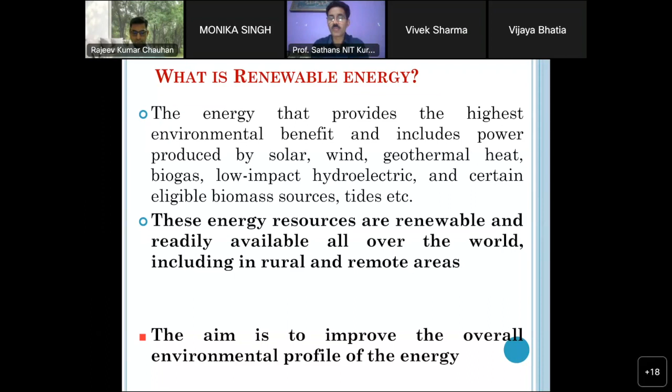These energy sources are renewable and readily available all over the world, including in rural and remote areas. The sun is available all across, wind is blowing all over the surface, there are tides somewhere. So we have this energy available all over. The aim is renewable energy, to improve the overall environmental profile of energy. Is the energy that we produce and use environmental friendly? So to improve the overall environmental profile of energy, we try and go in for renewable energy.

Why renewable energy? Number one reason, depleting fossil fuels. When we talk of fossil fuels, we talk of coal, oil, natural gas, etc. These fuels are limited, they have a limited stock underneath. There'll be a time when these sources will not be available. If you talk of oil, maybe 100 or 150 years down the line, if we keep using these fossil fuels at the pace we're using now, 50 or 100 years down the line we'll not be having these sources. Then what will happen? Where from shall we meet our energy needs? So depleting fossil fuels is one of the important reasons for thinking around other alternatives, and one of the important alternatives was renewable energy.

Concern for environment, another important reason. To me, I think this is rather reason number one. These fossil fuels are damaging the environment, creating this so-called climate change, creating global warming because of the burning of these fossil fuels and release of greenhouse gases, resulting in global warming and climate change. So concern for environment, the adverse impact of these fossil fuels on environment is one of the important reasons to go in for renewable energy.

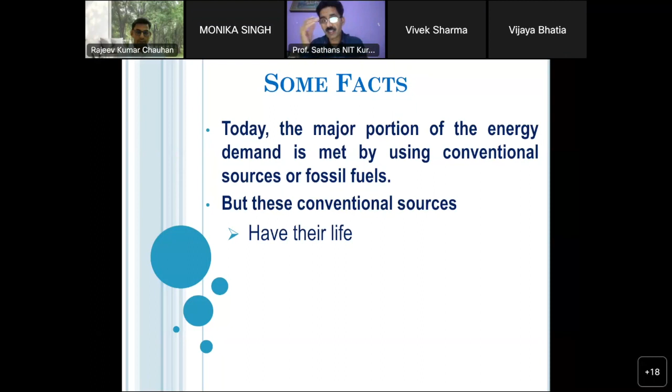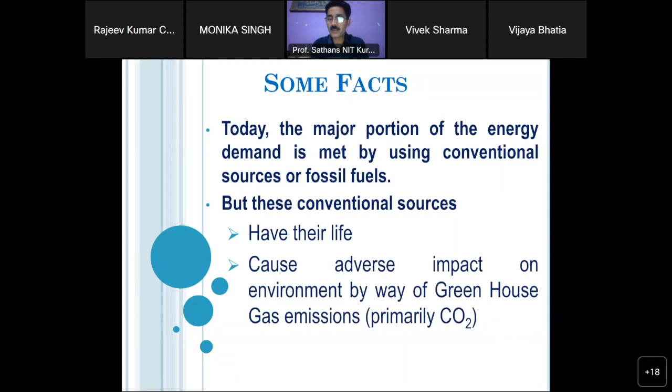So, and even otherwise, if you think that yes, these sources do have a life, these sources cause adverse impact, negative impact on the environment by way of greenhouse gas emissions, primarily CO2. So they do release, when the fossil fuels are burnt, the greenhouse gases, and one of the important constituents of greenhouse gases, and the sizable portion of that, is only CO2.

Continuing with the most abundant greenhouse gas, accounting for about 3/4 of greenhouse gases, is carbon dioxide, CO2. Almost 75-76% of the total greenhouse gases is your CO2 alone.

Other greenhouse gases are also there, and that includes methane. If you talk of CH4, methane, that's next in the proportion, right? Which comes from landfills, coal mines, agriculture, and oil and natural gas operations. These are some of the sources for methane. So that's another important greenhouse gas.

Nitrous oxide, N2O, which comes from using the nitrogen fertilizers that we use in our agriculture sector, and certain industrial and waste management processes, and burning fossil fuels. So these are the sources for nitrous oxide gas.

Then high global warming potential gases, GWP, which are human-made industrial gases, which are not naturally occurring. So these are the naturally occurring gases: CO2, CH4, N2O. But then we have high global warming potential gases, and these include, and that is the cause of concern, right?

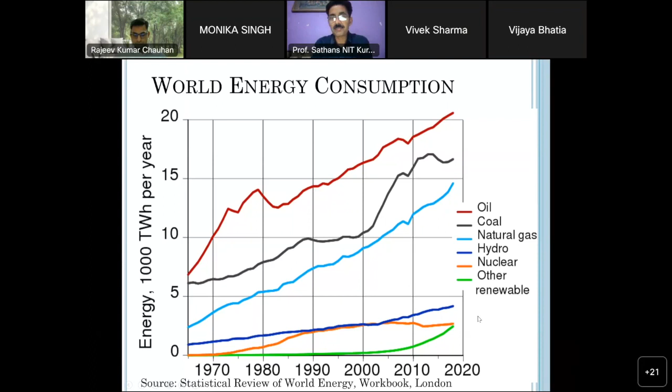If you talk of other renewable sources, from the 1970s until around 2000-2010, we can consider the share of renewable energy in this overall configuration to have been almost negligible. Since then, if you look at the slope of this green curve, it is rising very steeply. Though the data is a little old, given the pace at which this is rising, soon renewable energy will be surpassing all these other sources and will become the number one energy contributor in the overall energy mix. So, how much longer can we depend on fossil fuels?

We cannot continue at the same pace, because they are fossil fuels. They have a life expectancy beyond a certain point, whatever that may be - 50, 100, 150 years - without any renewables. But since we are concerned and worried, we have started working towards renewables, so we'll be having these reserves that we'll not be using.

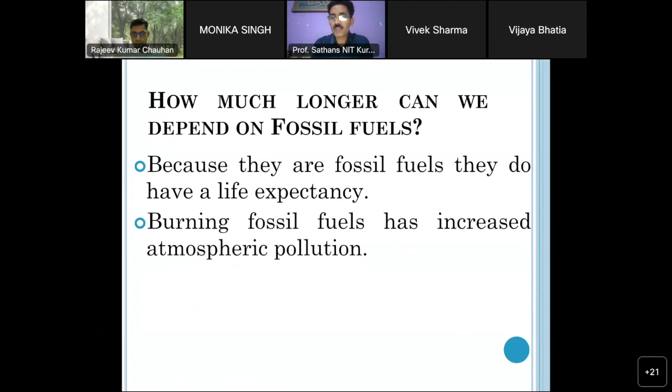Burning fossil fuels has increased atmospheric pollution. The carbon stored in fossil fuels is released as carbon dioxide when they are burnt, and this leads to the greenhouse gas effect, resulting in global warming.

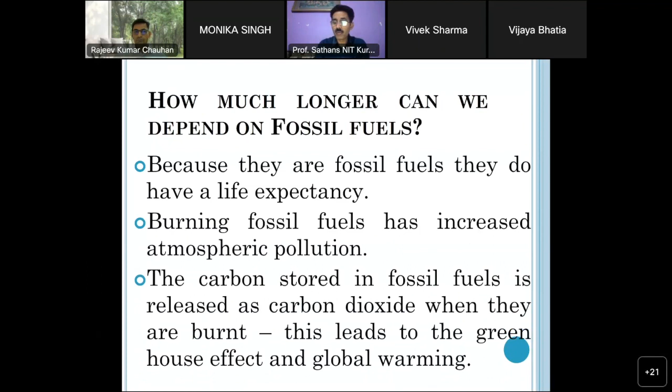So this is where we need to arrest this rise in temperature if we want to reverse climate change, or reduce global warming. We need to cap this, first stabilize it, and then make it negative. That's the need of the day, and countries and governments are working towards it - very soon, with renewables entering the energy mix, that will definitely reduce, and go towards the negative.

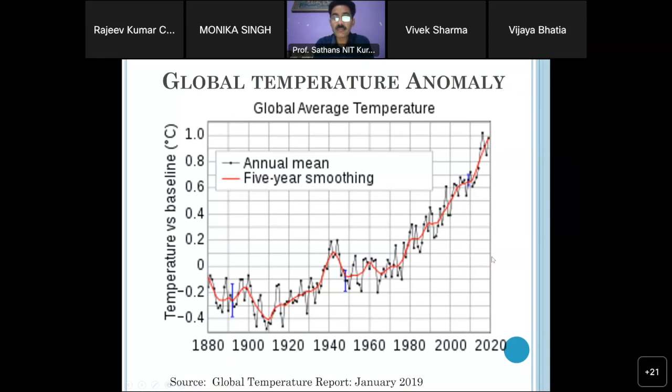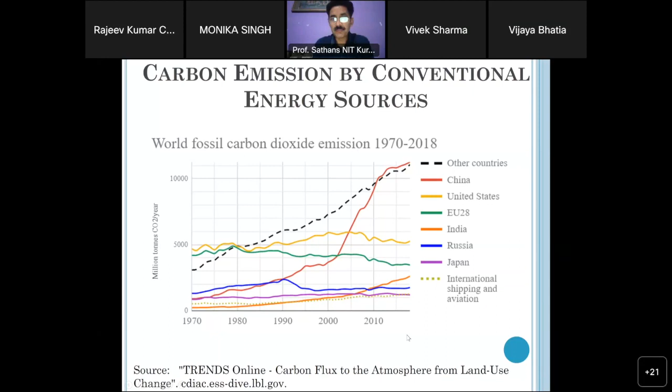Non-conventional energy sources are also known to you, or you may call them renewable. It's the same energy generated using wind, tides, solar, geothermal heat, and biomass, including farm and animal waste - this is known as non-conventional energy.

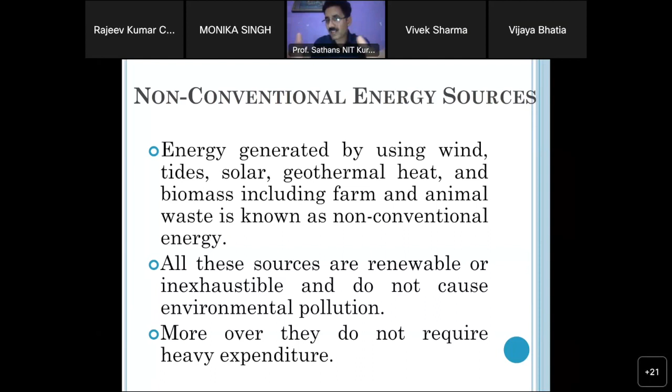All these sources are renewable or inexhaustible and do not cause environmental pollution. Moreover, they do not require heavy expenditure, except perhaps installation cost, and with evolving technology, even installation cost is coming down. Technology research around these resources is bringing down the production cost of windmills, solar PV cells, etc.

Non-renewable versus renewable: natural resources that can be replaced and reused by nature are termed renewables, and resources that cannot be replaced are termed non-renewables. Renewable sources are replaced through natural processes at a rate equal to or greater than the rate at which they are consumed, so depletion is usually not a worry.

If you talk of solar energy or wind energy, till the time there's life on this planet, there'll be wind flowing and there'll be sun. If there's no sun, there's no life - that's the end of it also. So for these resources, depletion is not a worry; they are there till there's life. Otherwise, there's no life and it's all gone and finished.

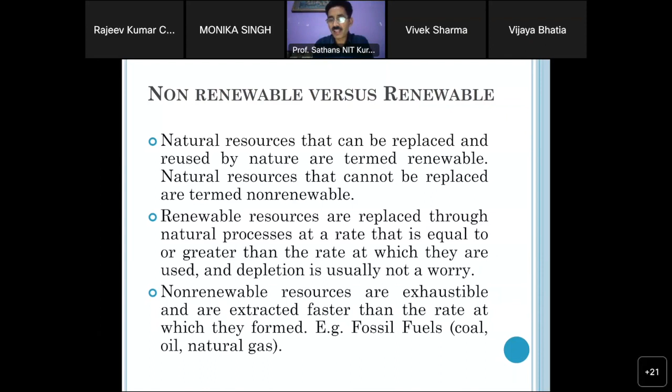Non-renewable resources are exhaustible and are extracted faster than the rate at which they are formed. For example, fossil fuels like coal, oil, and natural gas were formed over thousands of years, but they are being extracted and exploited at a pace that will lead to their extinction pretty soon. So that's exhaustible, so to say.

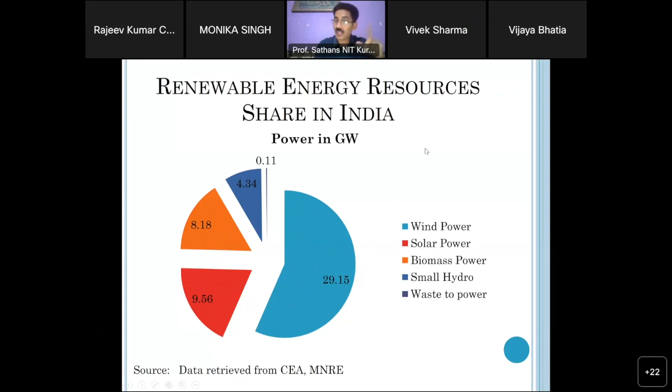Renewable energy resources here in India: we have wind power as the major source at 29.15, solar next at 9.56, then biomass, small hydro, and waste to power. That's the power in gigawatts. So 29.15 gigawatt is coming through wind in 2019, and this much is through solar, and so on.

Renewable power capacity additions: annual additions of renewable power capacity by technology, total from 2012 to 2018. The yellow is solar, blue is wind power, green is hydro, and orange is biopower, geothermal, ocean power, and concentrated solar power, CSP. Those from mechanical engineering background may understand this term.

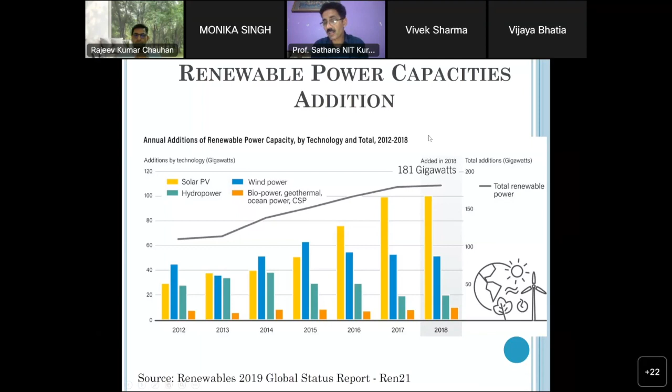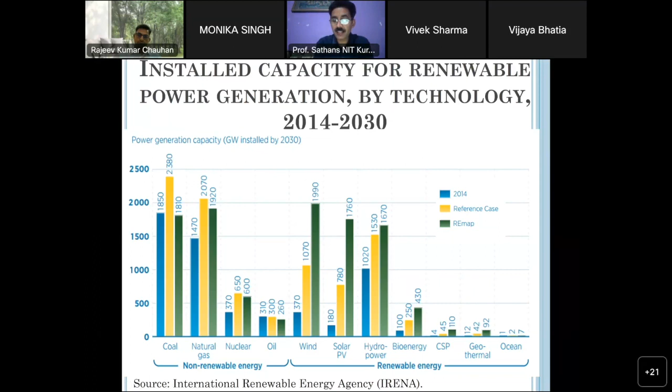Okay, here's a question for you - I think a very easy one. What is the target India has set for itself in terms of total power generation through renewable sources by 2022?

That's almost near the end, 2-3 months down the line, 2.5 months down the line we'll be closing on this. So what is the target set? 175 gigawatt - perfectly fine, okay, yeah, that's right.

175 gigawatt, and we've already achieved it. Yeah, that's true, so there's a revised target also. So the good thing is, okay, that's a wonderful thing - 175 gigawatt, perfectly right, that's a correct answer. 175 gigawatt is the target set for 2022.

About 100 gigawatt from solar, that's true. Another question - 175 gigawatt of renewable energy will contribute to 18.9% of the entire power consumption in India in 2022. So if you look at installed solar capacity and installed renewable capacity, 175 gigawatts somewhere here makes it some 18.9% of the total energy coming through renewables.

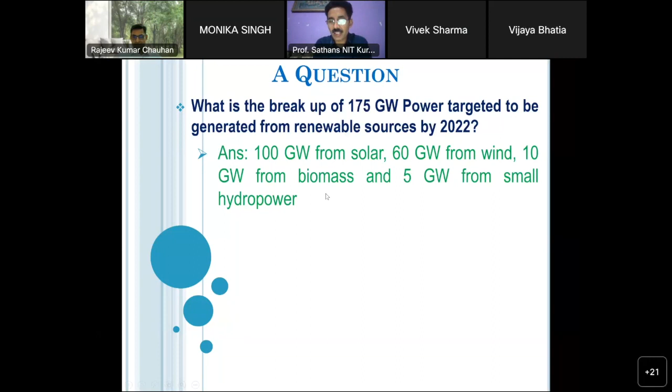100 gigawatt from solar, Monika, again right - 5 from small hydro, cool. So you can cooperate, somebody can answer 100 from solar, another person can answer 60 from wind, and the third person can say 10 gigawatt from biomass - that's cooperative management. So: 100 gigawatt from solar, 60 from wind, 10 from biomass, and 5 from small hydropower. Okay, that's the breakup of this targeted energy.

If it's CS, IT, electronics etc., there also should be at least one course around renewable energy. There's a whole lot of power electronics and computers being used in these technologies. These technologies, in fact, are the future of energy. That's the way forward.

Likewise, liquid biofuel, wind power, etc. So what I mean to say is that this sector of renewable energy has got huge potential for job openings, and not only for jobs, but also a wonderful scope for entrepreneurs, for startups and ventures that you can start on your own, and maybe hook up to the grid and supply energy to the grid. So not only jobs, but also entrepreneurial scope and startup scope of your own, right?

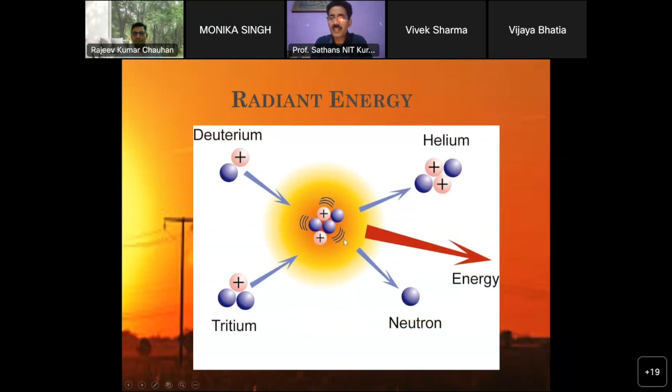Now we talk of solar energy, solar power. When we talk of solar power, we all know there's radiant energy coming from the sun, that's the physics and chemistry of it. This radiant energy coming from the sun has got so many uses.

Major uses of solar energy could be direct or indirect. If we think of direct use of energy, that's in the form of heating purposes—you could be heating water, or heating other things, that could be space heating as well. In some cold regions, houses are constructed so they let the radiant energy come in through glass panes, windows etc., and that energy warms up the inside of the house. So, space heating.

Generating electrical energy, we are using solar PV for generating electricity from solar energy. Solar technologies for daylighting, you could be using this—passive solar heating. Again, concentrating solar thermal, we could say something like this. If you're constructing a house like this, what you're doing is putting a lot of glass window panes and letting the natural light come in.

Nowadays we have these curtains available, right? Very nice, beautiful, and double layered. Maybe we do not let any ray come into the house, which is actually very bad. We should try and let as much solar radiant energy come in for lighting purposes. If natural light can serve the purpose, why do we have artificial light switched on? Why do we put up the curtains and then switch on the lights? Instead, we can do with the natural light in, we should.

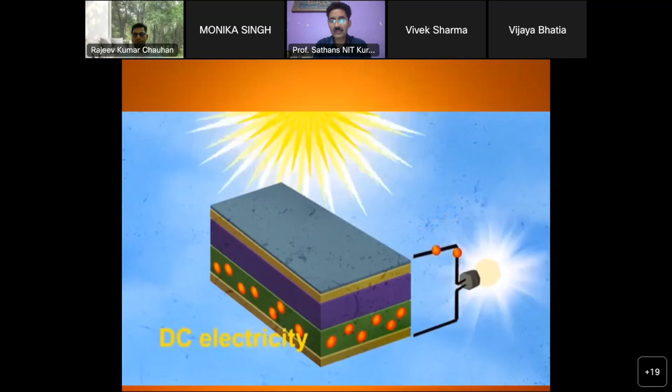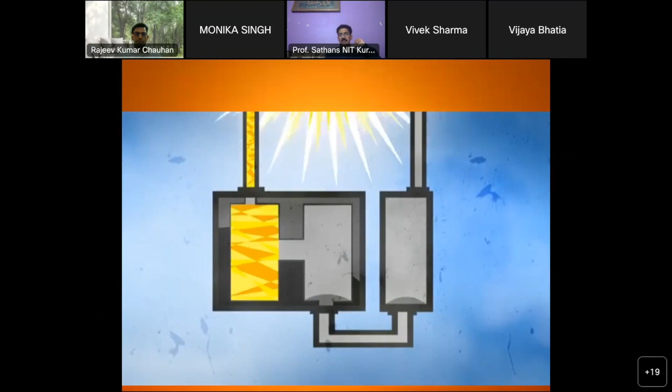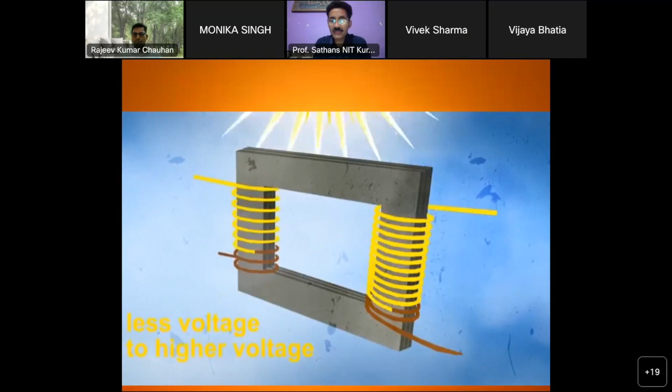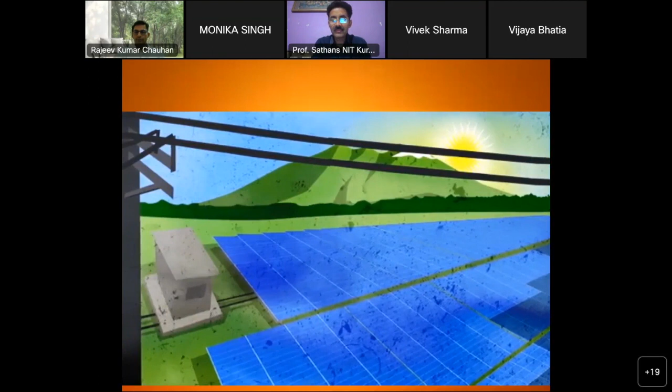Our city depends on electricity. By burning fossil fuels like coal, diesel, and natural gas, we are able to generate electricity from steam turbines. But what happens when we deplete these limited resources? Without fuel, there won't be enough electricity to power central Luzon. There will be brownouts, hospital equipment will shut down, streets will be dark and dangerous, electronic communications will be disabled, businesses will be paralyzed, and children won't get the quality of education they deserve. These will become long-term problems, affecting our lives and slowing the progress of growing cities in central Luzon. But hope shines above us: the infinite power of the sun. So how can we harness this power? These are solar cells. They can convert light energy into electricity. Each cell contains two pieces of silicon, one negatively charged and one positive. When light particles collide with the negatively charged silicon, electrons fall and get attracted to the positively charged silicon. As electrons travel from silicon to silicon, they create a current, called direct current electricity, or DC. This is the type of electricity found in a battery. A number of solar cells connected to each other and mounted in a frame is called a module. Each module is designed to generate about 30 volts DC. To generate large amounts of electricity, modules are grouped together to form an array. These are scattered throughout an open field to capture as much solar power as possible. But this electricity is still not ready for public use. It needs to be converted to match the type of electricity needed by home appliances. That's why solar power plants have inverters and transformers. The inverter converts the single-direction DC electricity into multiple directions of alternating current, or AC. The electricity then flows to the transformer and is boosted to 13,800 volts to reduce power loss when transmitted over long distances. From the transformer, electricity flows to a substation, which regulates it to a usable 220 volts using another transformer and distributes power to homes. This is how the Raslag solar power plant in Mexico, Pampanga works. It generates about 10 megawatts of electricity that can power almost 9,000 households, or 5 barangays. Unlike fossil fuel plants, which can be depleted and produce carbon emissions that harm the environment, Raslag runs on 100% renewable energy from the sun. In time, this clean and efficient energy source can help save us from a power crisis. It generates electricity from the free light of the sun and lessens the cause of global warming that destroys the planet. With the sun's energy, we can have a better community that is safe, empowered, and progressive. I'm Ruslan, and the power of the sun is yours.

So that was our small video for you. All right, I hope you could appreciate that.

The power of the sun, obviously, yes, that's free energy available for all times to come, till the time there's life and there's the sun. So the advantage of solar energy: it's clean, that doesn't cause any pollution. It's sustainable, can be used for any duration. I mean, obviously when it's daytime then only you can use it, but it's sustainable, there'll be energy available till the time there is a solar system.

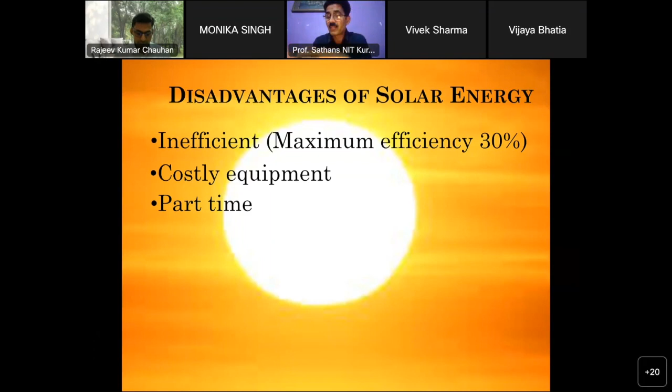And we need to be grateful to God in that sense, grateful to nature, and we should take pride in the fact that we are born in this country. If we can be caring to our own country, to the geography, to the nature, and we use our resources honestly and judiciously, and we run our country with all honesty, definitely we are in a way self-sufficient in so many things. We don't have to look outward for anything in that sense.

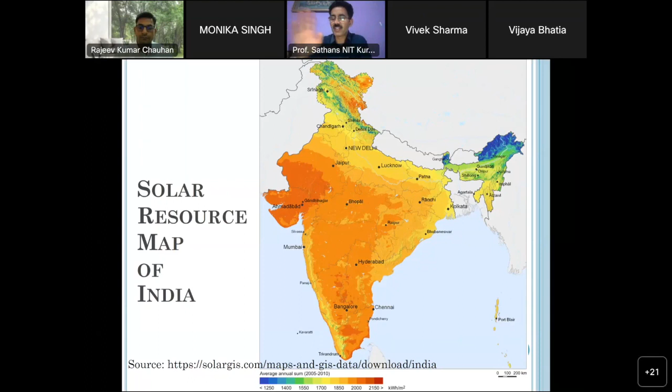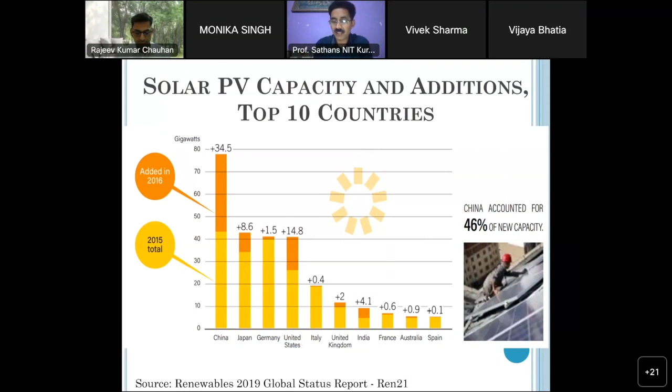Japan added 8.6 gigawatts, Germany 1.5 gigawatt, United States some 14.8, and we added 4.1 gigawatt in 2016. But as of now, we are maybe far ahead of at least two of these countries. Then Australia, France, and Spain. So these are the top 10 countries in terms of annual additions and total solar power capacities. We can also be proud of our growth.

Here's a question for you: do you know where is the world's biggest solar power plant?

Hello, are you there? I hope you're all connected with me. India again, Monika saying yes. India, okay. All right, yes, that's absolutely correct.

In India, and where? That's in Rajasthan, Bhadla Solar Power Park, that's true. So let's go to the answer now. Yes, Rajasthan, that's correct. The biggest solar power plant in the world, we can take pride in this fact. That's Bhadla Solar Park, Jodhpur, Rajasthan, India, with a capacity of 2,245 megawatt. When the two solar power parks were combined together, so that became the addition, extension of this.

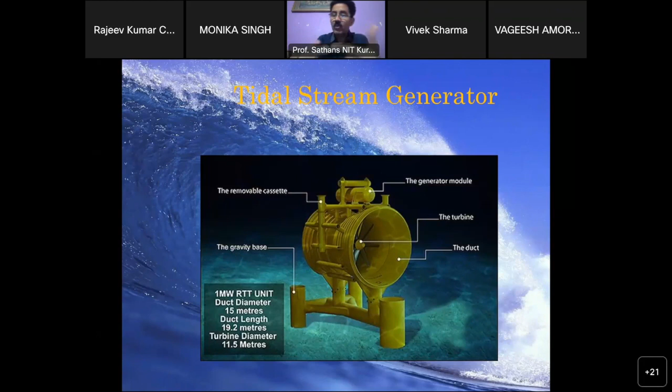So that's the construction. These are the gravity bases, which are fixed, grooved onto the surface, and there's a coupled removable cassette. Onto that there is the generating module, coupled here onto it. So when the water flows in, it moves this turbine, coupled with that it generates electricity. When the water recedes back to the sea, again it moves and produces electricity.

I think there's a video again for you to appreciate, maybe. I think it's smaller than the previous one.

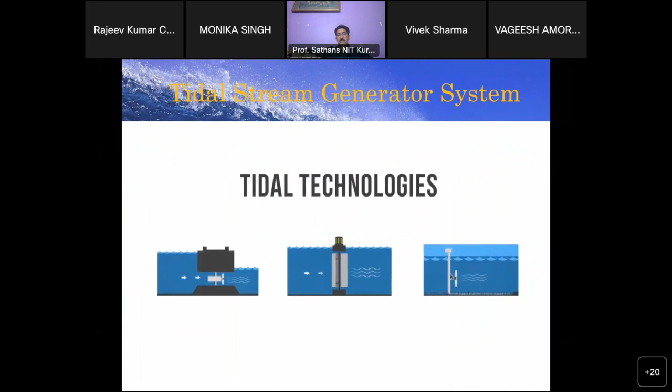Tidal power is a form of hydropower that converts the energy from the natural rise and fall of the tides into electricity. Tides are caused by the combined effects of gravitational forces exerted by the moon, the sun, and the rotation of the earth. Tidal plants can only be installed along coastlines. Coastlines often experience 2 high tides and 2 low tides on a daily basis. The difference in water levels must be at least 5 meters high to produce electricity. Tidal electricity can be created from several technologies, the main ones being tidal barrages, tidal fences, and tidal turbines. Tidal barrages are the most efficient tidal energy sources.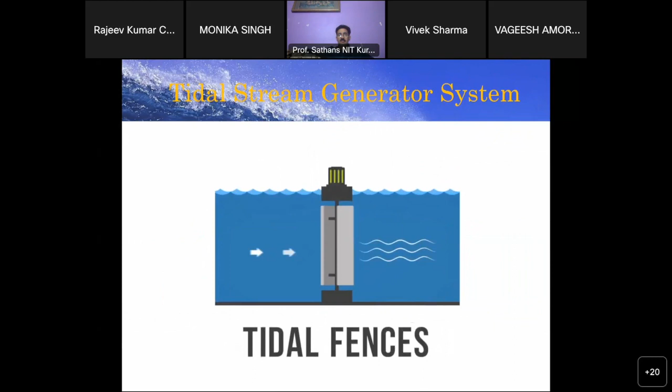A tidal barrage is a dam that utilizes the potential energy generated by the change in height between high and low tides. This energy turns a turbine or compresses air, which in turn creates electricity. Tidal fences are turbines that operate like giant turnstiles, whereas tidal turbines are similar to wind turbines, only underwater. In both cases, electricity is generated when the mechanical energy of tidal currents turns turbines connected to a generator, which produces electricity. Ocean currents generate relatively more energy than air currents because ocean water is 832 times more dense than air and therefore applies greater force on the turbines.

Tidal power is easy to install and renewable, having no direct greenhouse gas emissions and a low environmental impact. Because the ocean's tidal patterns are well understood, tidal energy is a very predictable energy source, making it highly attractive for electrical grid management. This sets it apart from other renewables that can be more unpredictable. However, adoption of tidal technologies has been slow, and so far the amount of power generated using tidal power plants is very small. This is due largely to the very specific site requirements necessary to produce tidal electricity. Additionally, tide cycles do not always match the daily consumption patterns of electricity and therefore do not provide sufficient capacity to satisfy demand. That's tidal power.

This was the video showing you tidal power, and all the ways you can generate it. It's basically the high tides and low tides and the water flowing in and out that's made use of. There could be different constructions, barrages and fences and tidal turbines you could be using to exploit this kinetic energy.

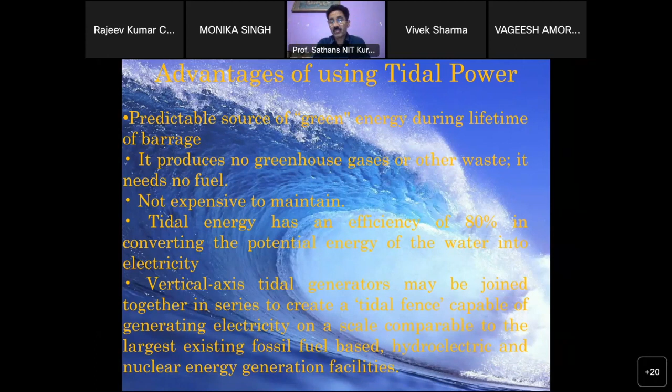Vertical axis tidal generators, shown in the middle of that video as the fence type, may be joined together in series to create a tidal fence. This tidal fence is capable of generating electricity on a scale comparable to the largest existing fossil fuel based hydroelectric and nuclear energy generation facilities. It's just a matter of how you configure your generating station and which technology you use, and you can produce any amount of electricity.

Disadvantages of tidal power: a barrage built primarily across an estuary, which is the location on the coastline where you can construct a barrage, is very expensive to build and affects a very wide area. The environment is changed for many miles upstream and downstream, and the very ecology gets changed as well.

Some sea species may move along with the water upstream and get retained on the land itself, so they may die, and some land species may get dragged into the sea. This kind of ecological effect on biological species is a disadvantage of tidal power.

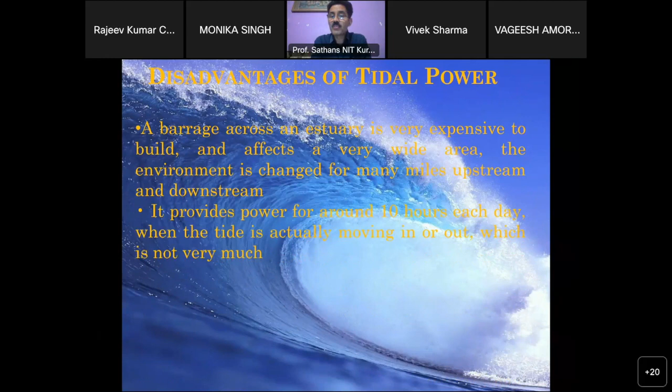It provides power for around 10 hours each day, out of 24 hours, when the tide is actually moving in or out, which is not much. That means the facility you constructed is idle for 14 hours a day, used only for 10 hours. And for those 10 hours, whether the load requirements around that local area exist or not doesn't matter. If there's no load requirement at that estuary site where you construct the barrage, you'll generate and transmit the power to a different place. Nowadays there are good grid networks available, so you can transfer that. But still, it's only for 10 hours a day that the facility is being used.

Existing ecosystems would be heavily altered with new species moving in and perhaps dominating the old species. The ecosystem upstream and even downstream gets heavily altered this way.

Tidal power schemes have a high capital cost. That's a disadvantage of it.

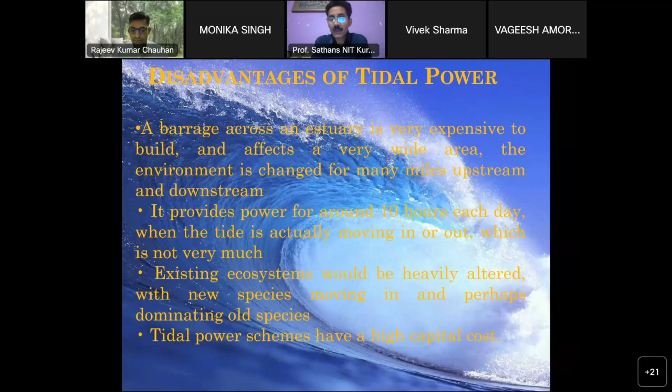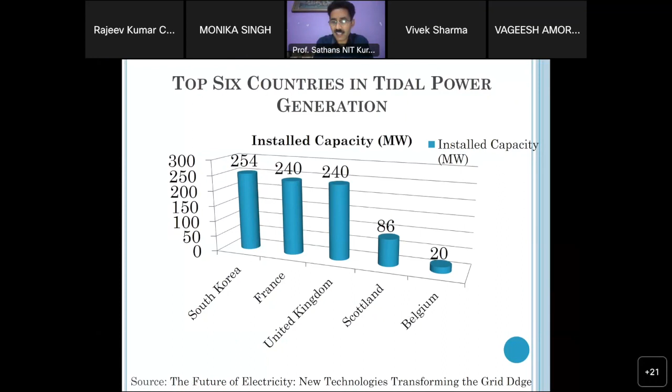Okay, these are the top 6 countries in tidal power generation, with installed capacity in megawatts, not gigawatts. South Korea 254 megawatt, France 240, United Kingdom again 240, Scotland 86 megawatt, and Belgium 20 megawatt. We don't figure here in India as of now; we do not have a single tidal power station. Though there are plans, and there's a potential, not much, but there's a potential, and I think that's covered in the next slide. But yes, these are the top 6 countries in tidal power.

There is currently no tidal power plant in India. Although, according to estimates of the Indian government, the country has a potential of 8,000 megawatt of tidal power. This includes about 7,000 megawatt potential in the Gulf of Cambay in Gujarat, 1,200 megawatt in the Gulf of Kutch, and 100 megawatt in the Gangetic Delta region in the Sundarbans of West Bengal. So that's the total potential we have in our country, around 8,000 megawatt of tidal power.

It's good news that the government of Gujarat is all set to develop India's first tidal energy plant. The state government has approved rupees 25 crore for setting up a 50 megawatt plant at the Gulf of Kutch. That's a good beginning, the first of its kind in India, in Gujarat. If this one goes successful, and there's a potential of 8,000 megawatt, we should try and exploit this potential. Why not? So maybe in times to come, we'll have this one and the next tidal power plants as well.

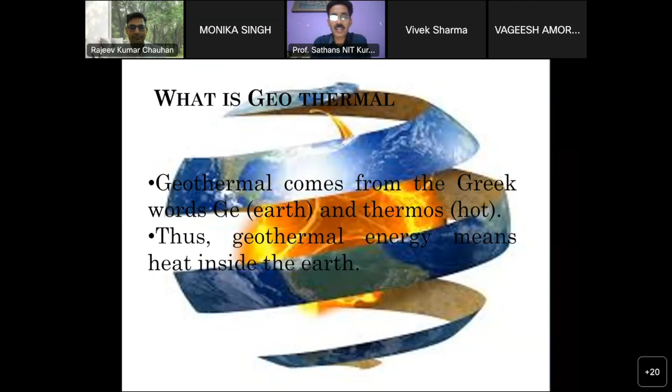So geothermal energy means heat inside the earth. The earth is made of layers. Let us refresh our memories of school days. There is the uppermost surface on which we are all living - that's the crust. The innermost is the iron core. Next, surrounding that is the outer core, which we call magma. Further outer is magma and rock, then we call it the mantle. And we have the crust.

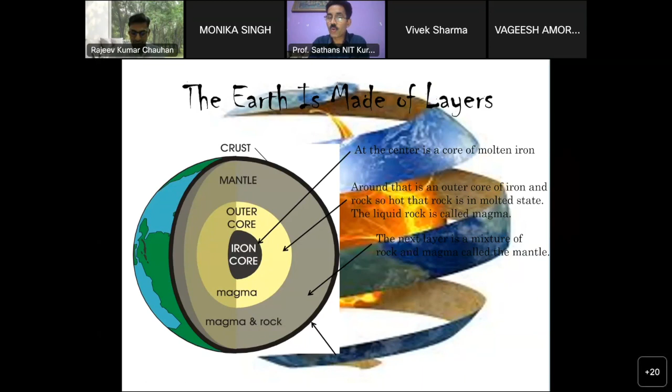At the center is a core of molten iron, maybe around 5000 degrees Celsius - imagine the temperature there. Around that is an outer core of iron and rock, so hot that the rock is in a molten state - this liquid rock is called magma. Imagine the heat in that core. The next layer is a mixture of rock and magma called the mantle. And the outermost is the shell of the earth with oceans and mountains, called the crust. That's how the earth's surface is made up of layers until the core.

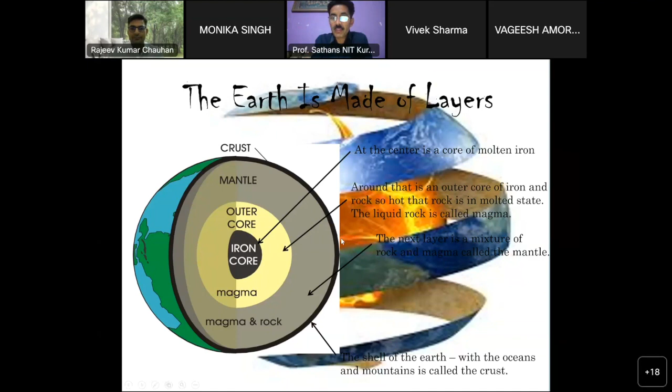So the energy we're talking about is this heat, right from the innermost core until whatever levels. The inside of the earth is very hot, and that's geothermal energy - heat inside the earth. We can use this heat to warm our houses and produce electricity.

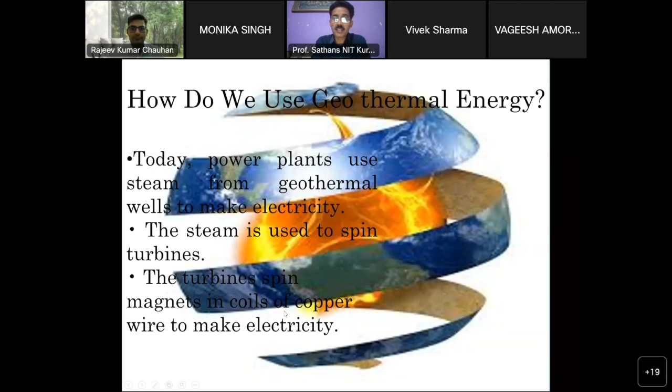So how do we use this geothermal energy? Today, power plants use steam from geothermal wells to make electricity. We can dig wells deep inside until we reach a point with good geothermal energy available, whether it's steam, boiling water, or some other liquid form. We make use of that heat to generate steam and produce electricity. The steam is used to spin turbines, and the turbines spin magnets in coils of wire to generate electricity.

There's a video here, a very short video for you, showing heat energy converted into electrical energy.

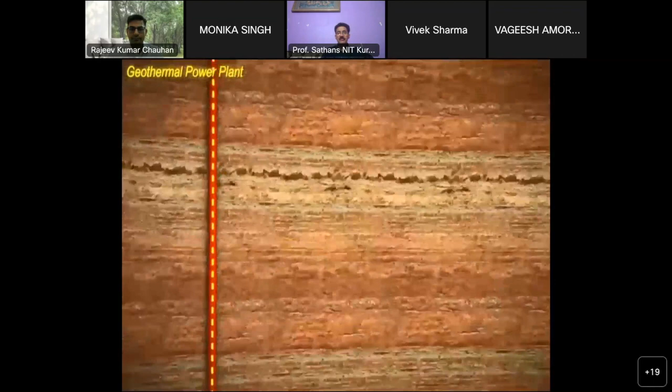Geothermal power plants draw from underground resources of steam. The steam is piped directly from underground wells to the power plant, where it is directed into a turbine and generator unit, and the heat energy is converted into electricity.

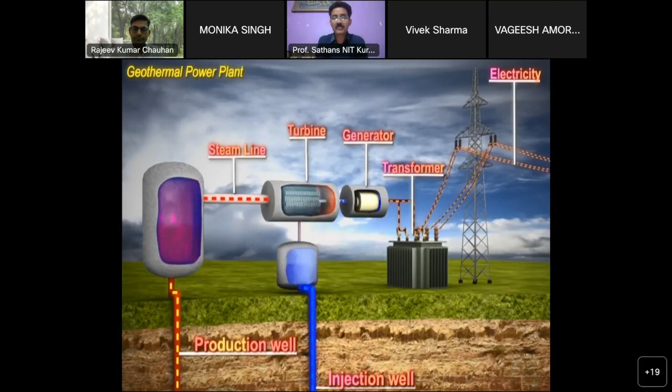So that's just a small demo of it. You could extract that heat by digging deep down to a reasonable depth, and use that heat energy for power.

We do not have much potential of geothermal energy, because this is mostly available around areas where volcanoes erupt. So in those lands you have this potential, but in our country we don't have much geothermal potential. Where can we find geothermal energy? The most active geothermal resources are usually found where earthquakes occur, and volcanoes, hot springs, and geysers are concentrated.

In our country, at some places we do have these hot springs, garam pani ka chashma, where you get boiling water coming out of the surface. We can try and make use of that for certain heating purposes, but there's not much potential of geothermal energy in our country.

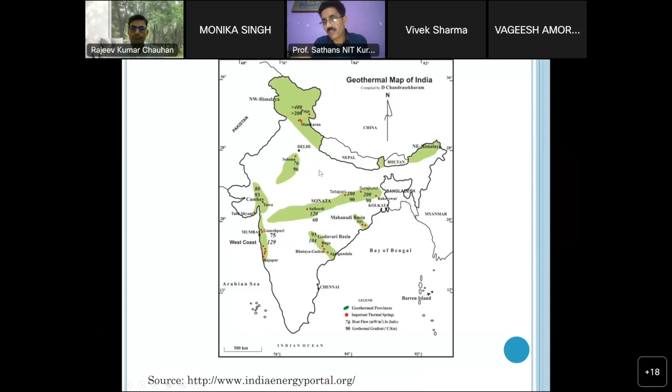Next up is hydroelectric energy, and in another 10 minutes I'll finish this off, and that's where I can close and take your questions. So just bear with me another 7, 8, 10 minutes, and I'll be closing.

Hydroelectric energy is a simple and straightforward source of energy. We all know this, but still I'll quickly scan through these slides.

Layout of a hydropower plant: there is a dam that is constructed, and upstream we have a huge storage of water. The height of the dam is pretty high, maybe over 1000 feet, with the water body available on the upstream.

Inside the hydropower plant we have the reservoir, the dam, and a turbine coupled with a generator. Through the penstock, water comes at pressure, striking the blades of the turbine, which in turn rotates the generator, and electricity is generated. That's the whole idea of it.

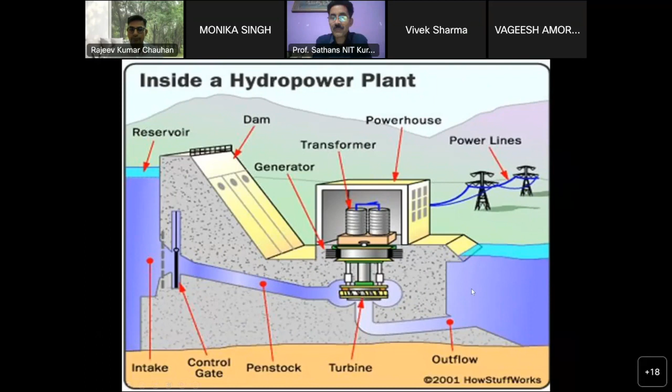Location of hydropower plants is generally onto rivers, especially large dams on rivers that are perennial, flowing all through the year. It could also be local streams, small rivulets, or high pressure water sources where dams can be constructed.

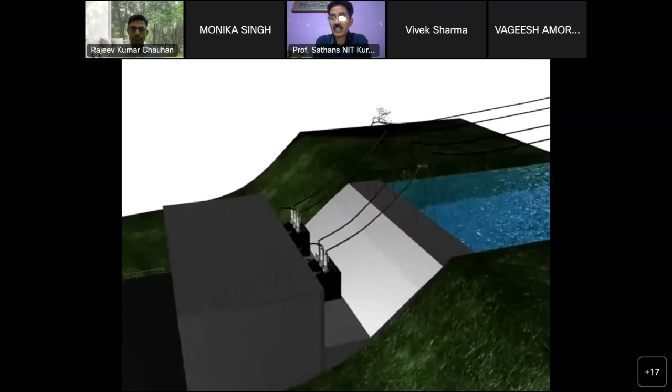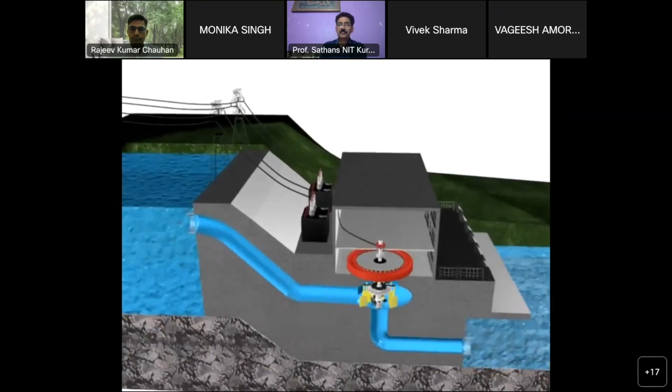Working of a hydroelectric power plant - if you see, there's a video I believe. Let me quickly show that also. I think this is without audio.

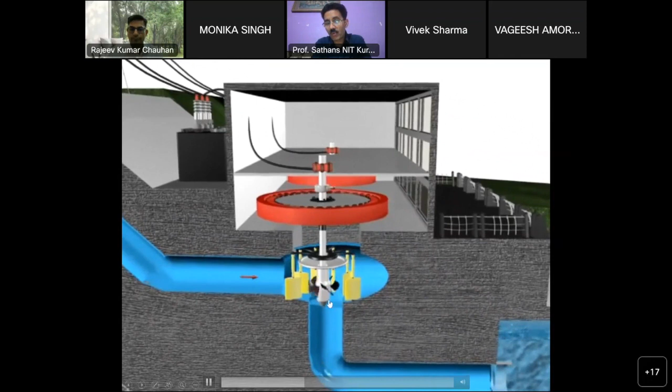There is water from the reservoir flowing in through the penstock, a huge pipe, maybe many meters in diameter. This water strikes the turbine blades, which are coupled with a genset that rotates the generator rotor, generating electricity. The water then goes down the drain through a pipe and flows out, used for irrigation and other purposes. That's the simplest animation video I thought I could fit in here.

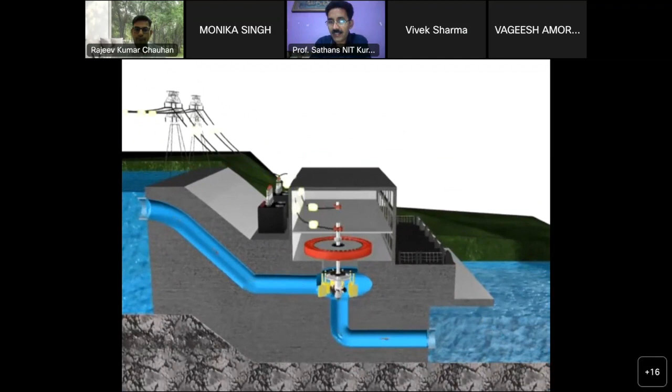This electricity source generated is then taken through a transformer and stepped up to certain voltage levels, transmitted through, and made use of at distant places. We have many dams in our country. That was the animation, though you might not have liked it that much, but it is still informative.